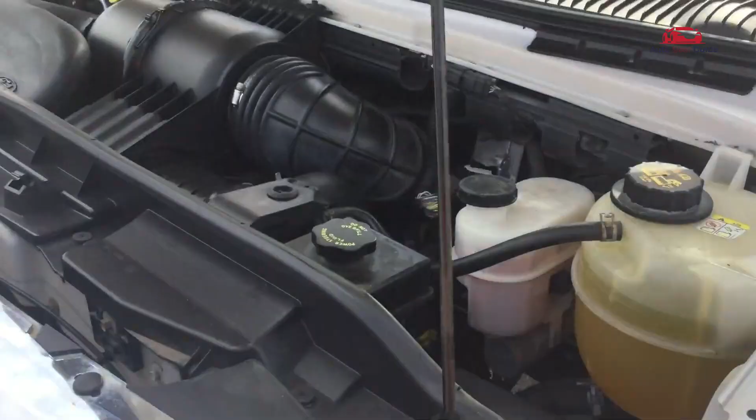Curious about the fuse box location and diagram for the Ford E-350, 2009 to 2015? Wondering where each fuse panel is and what its functions are? This guide answers all your questions, helping you easily locate and understand every fuse.

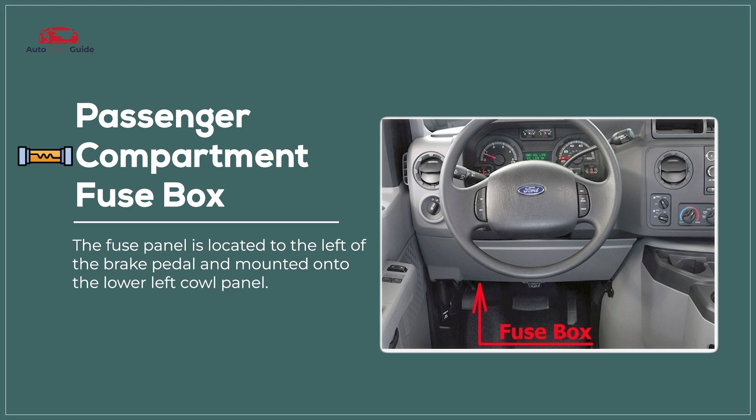Passenger compartment fuse box. The passenger compartment fuse box in the Ford E-350, 2009 to 2012, houses fuses that protect essential interior electrical components. It includes circuits for features such as power windows, radio, interior lights, and climate control. Each fuse is clearly labeled for easy identification and maintenance. The box supports standard blade-type fuses for straightforward replacement.

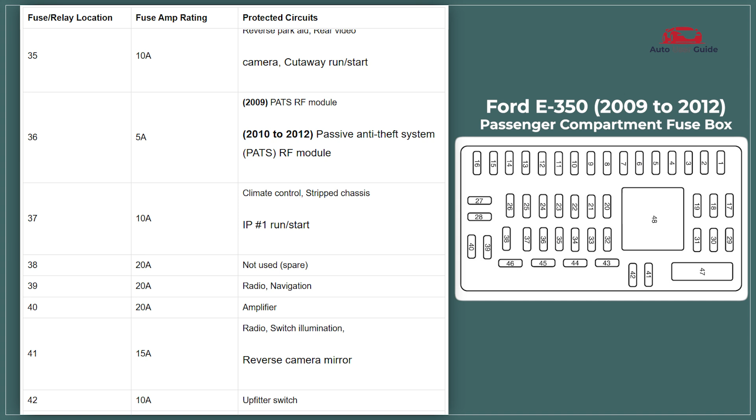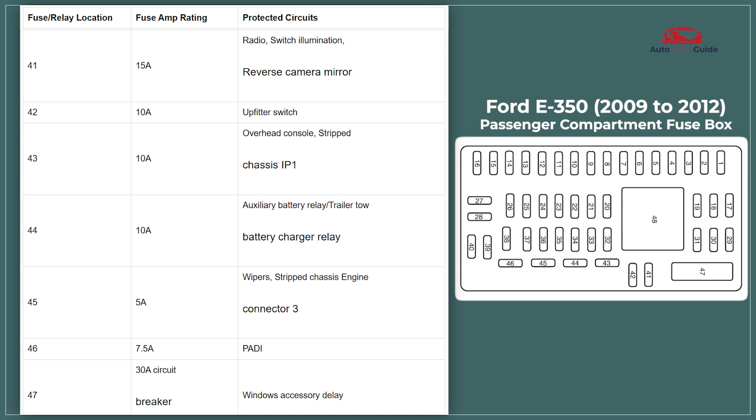The passenger compartment fuse box in the Ford E-350, 2013 to 2015, manages circuits for key interior systems like the audio unit, power door locks, interior lighting, and electronic control modules. It uses standard mini blade fuses and includes a fuse puller for convenience. Fuse positions and functions are labeled for quick troubleshooting and service.

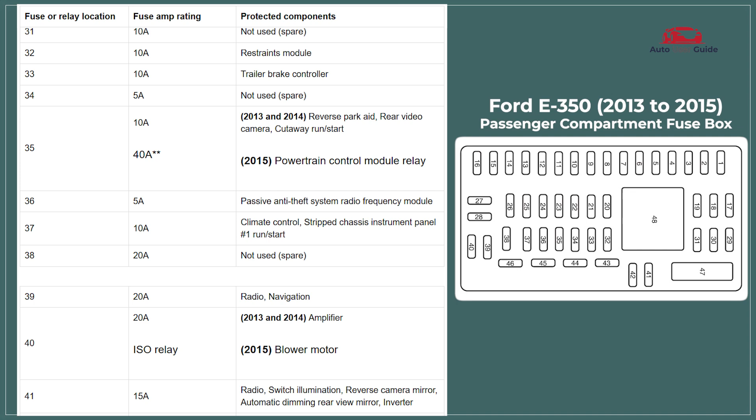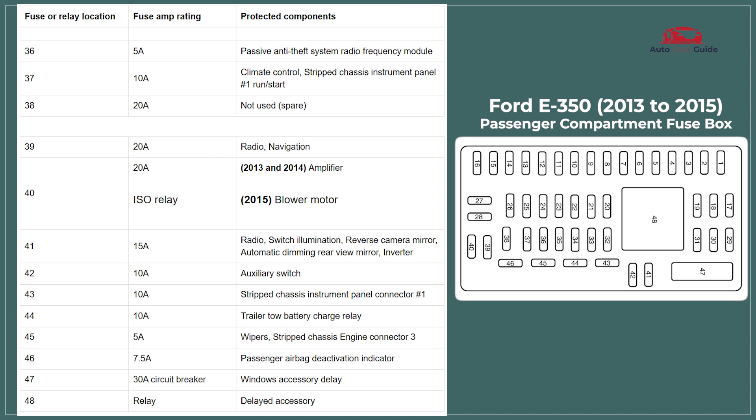Engine compartment fuse box. The engine compartment fuse box in the Ford E-350, 2009 and 2010, safeguards high-current systems such as the fuel pump, ABS, cooling fans, and ignition components. It uses a mix of cartridge and mini fuses for various load requirements. Relays for major systems are also integrated within the box. Clear labeling aids in quick diagnostics and repairs.

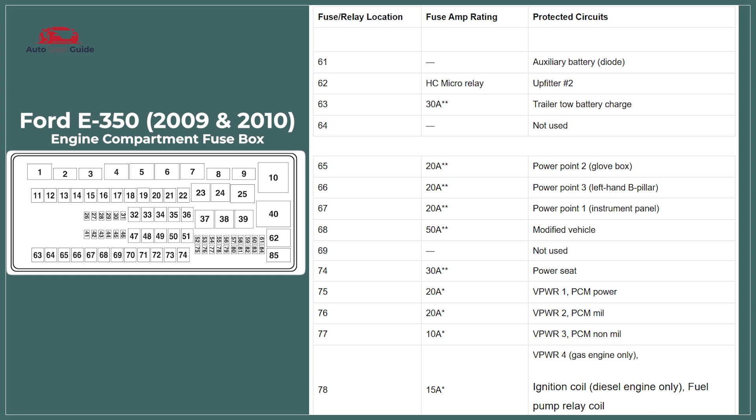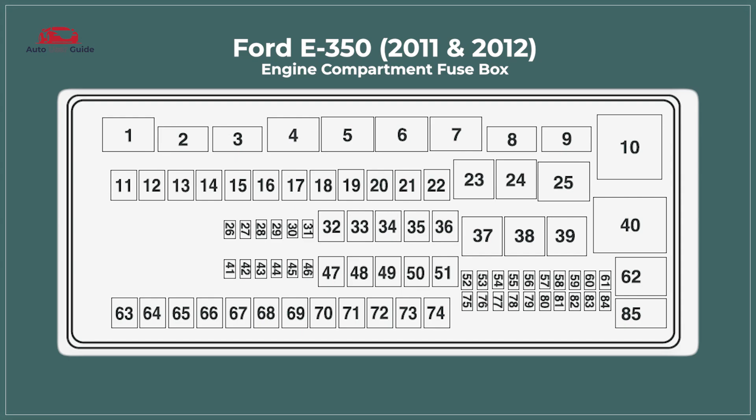The engine compartment fuse box in the Ford E-350, 2011 and 2012, supports vital systems like the PCM, starter motor, headlights, and fuel system. It combines high-current fuses, mini fuses, and relays to manage various electrical loads efficiently. Each component is labeled for ease of service and identification. The layout is designed to streamline diagnostics and maintenance.

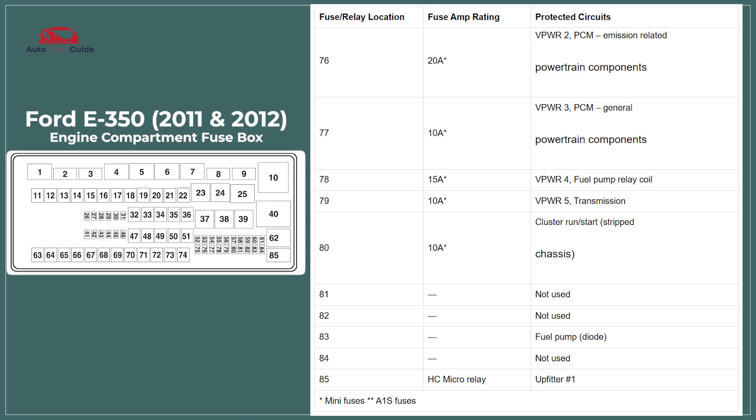The engine compartment fuse box in the Ford E-350, 2013 to 2015, controls high-power systems such as the powertrain, lighting, ABS, and electric fans. It contains a combination of high-current fuses, mini-fuses, and integrated relays. The layout is optimized for quick diagnostics with clearly marked circuits. Durable construction ensures reliable protection in demanding engine bay conditions.

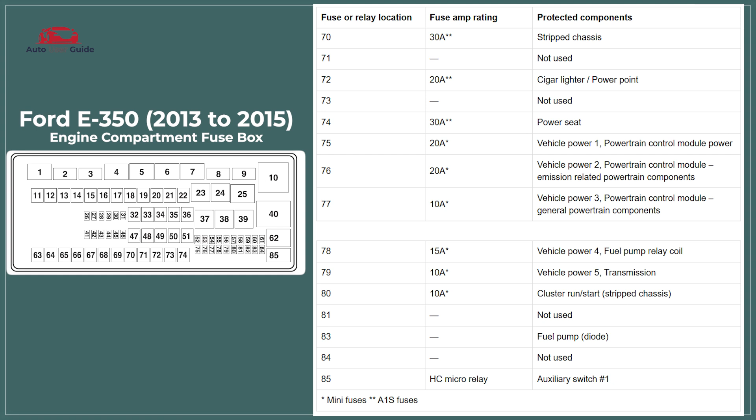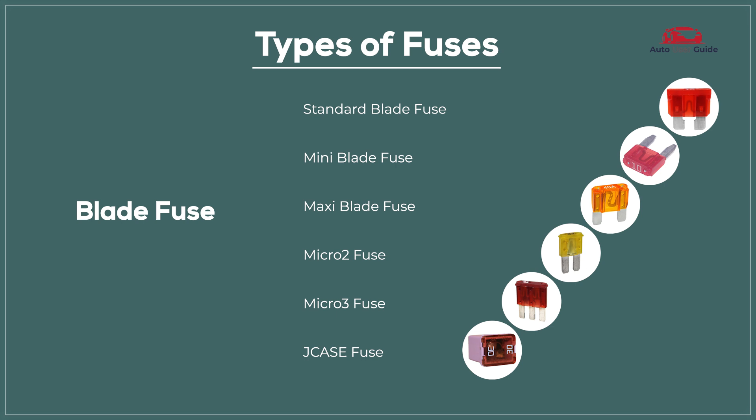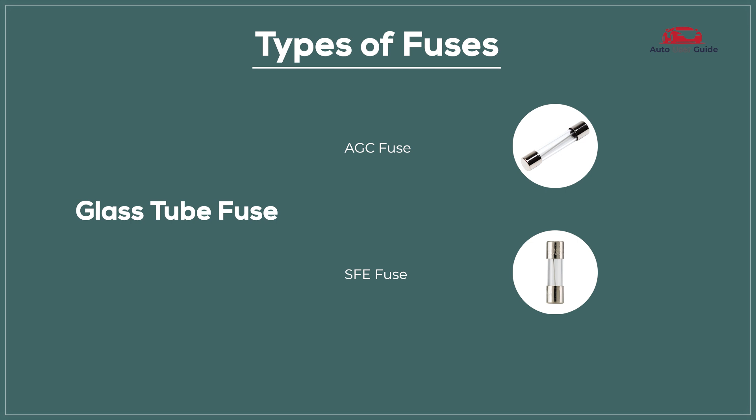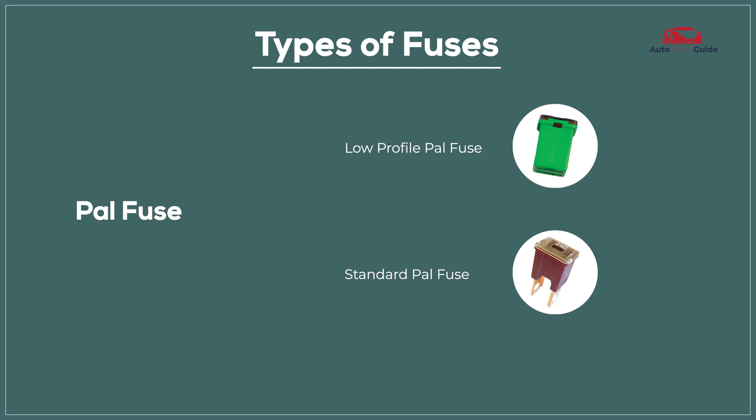Type of fuses: blade fuse, standard blade fuse, mini blade fuse, maxi blade fuse, micro 2 fuse, micro 3 fuse, J-case fuse. Glass tube fuse, AGC fuse, SFE fuse. Ceramic fuse, Bosch fuse, DIN fuse. PAL fuse, low profile PAL fuse, standard PAL fuse. Link fuse, mega fuse, high amperage link fuse.

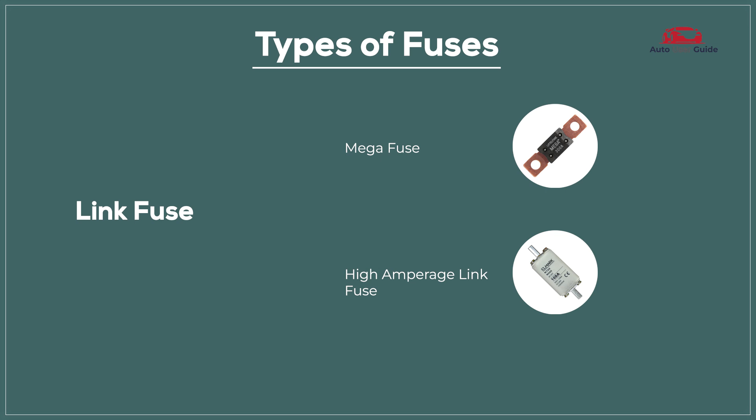Fuse conditions. Blown fuse: a blown fuse means it's no longer functioning and needs replacement, while a perfect fuse is in good working condition and performing as expected.

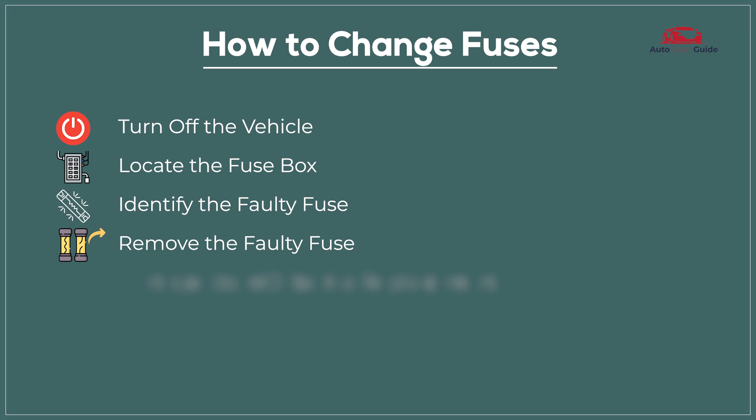How to change fuses. Turn off the vehicle, locate the fuse box, identify the faulty fuse, remove the faulty fuse, inspect and obtain a replacement, install the new fuse, test the replacement.

Safety precautions: disconnect the battery, wear protective gear, use proper tools, check for correct amperage, avoid water exposure.